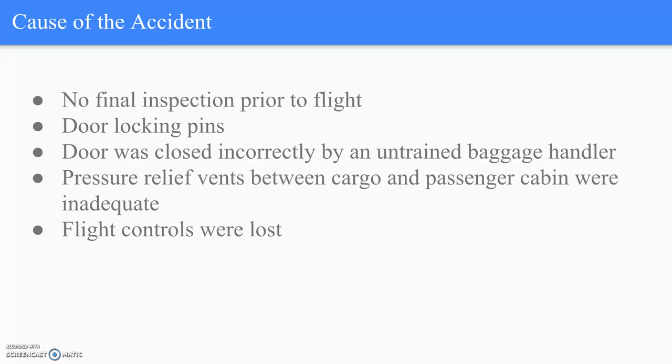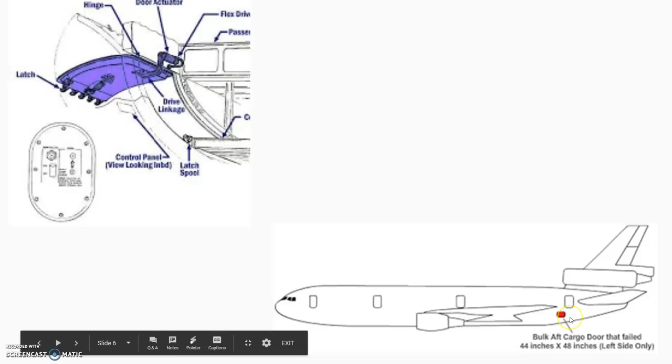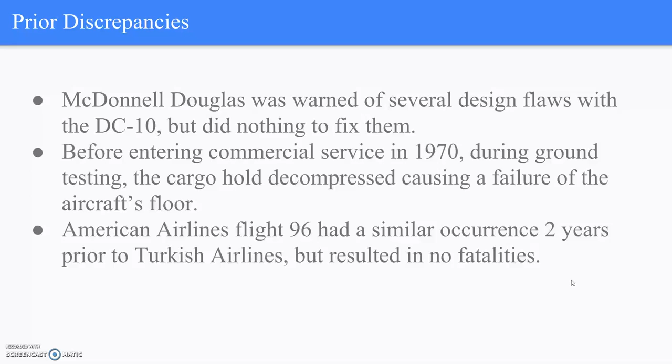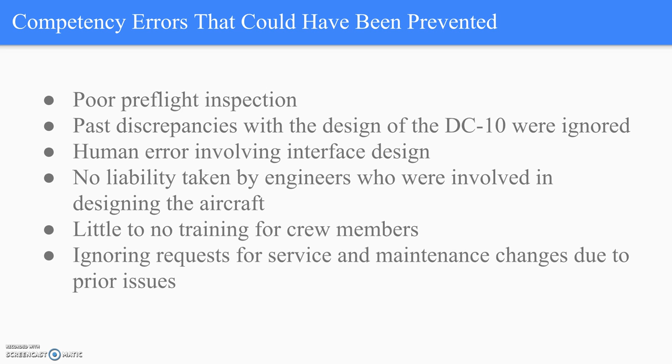Hi, my name is Seth, and I will be continuing from this slide. So the next slide I'll be talking about is the competency errors that could have been prevented before the flight. The first one is the poor pre-flight inspection. The second one would be the past discrepancies with the design of the DC-10 being ignored. The next bullet would be the human errors involving interface design. The next one would be no liability taken by engineers who were involved in designing the aircraft. Next one would be little to no training for the crew members. And the last bullet would be ignoring requests for service and maintenance changes due to prior issues.

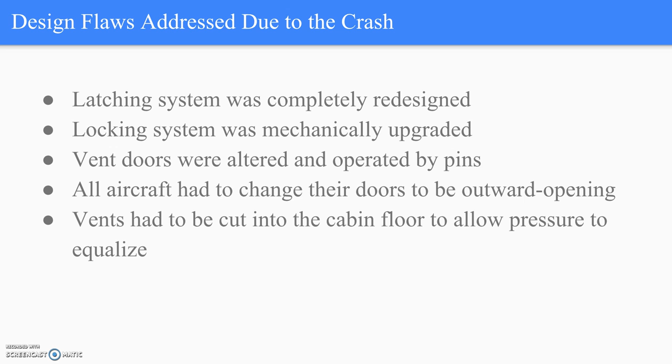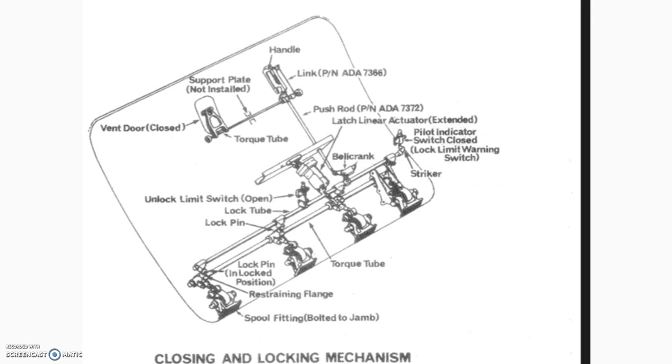Hey, my name is Saeed. On this slide, after the crash, the company redesigned the latching systems, and vents had to be put into the cabin floor to allow pressure to be equal. This picture shows a closing and locking mechanism that was created to close the doors and lock the pins, and the other tools.

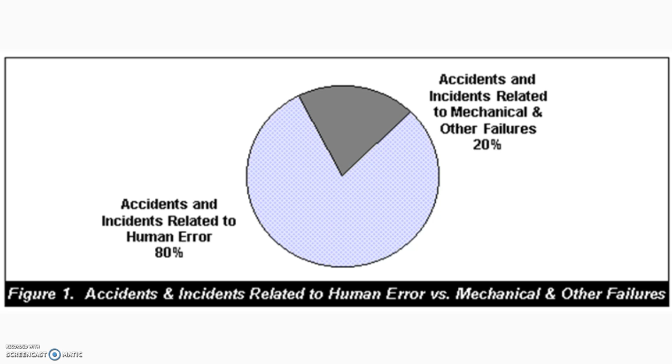Well, Turkish Airlines could have avoided this accident by having routine flight checks, maintenance checks, high quality training, resources, management to check off employees, and a safe environment. This picture shows 80% human error and 20% mechanical and other failures.

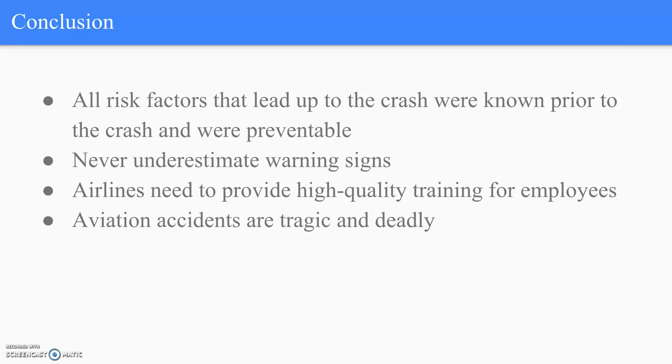Conclusion: all factors that led up to the crash were known prior to the crash and were preventable. Never underestimate a warning sign: airlines need to provide high quality training for employees. Aviation accidents are tragic and deadly, and those are some resources.